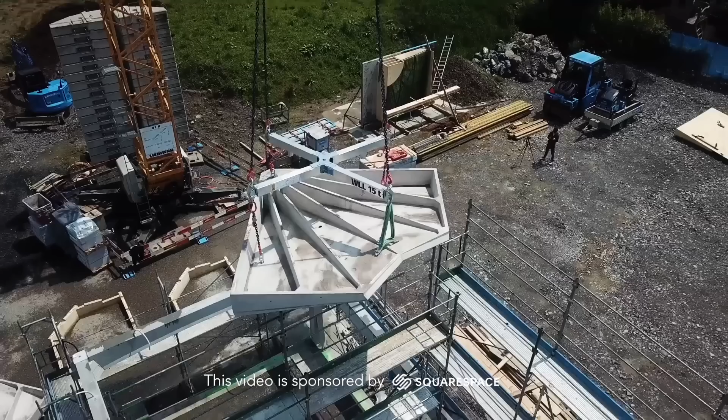Did you know that reinforced concrete has a hidden weakness, which turns buildings into a ticking time bomb? The buildings won't explode, but after 50 to 100 years, sometimes even earlier, many of those buildings will need to be renovated or even demolished. But there is more. The material is linked to the disappearance of entire beaches and responsible for insane amounts of emissions. But there might be solutions, which have been passed down to us through the ages.

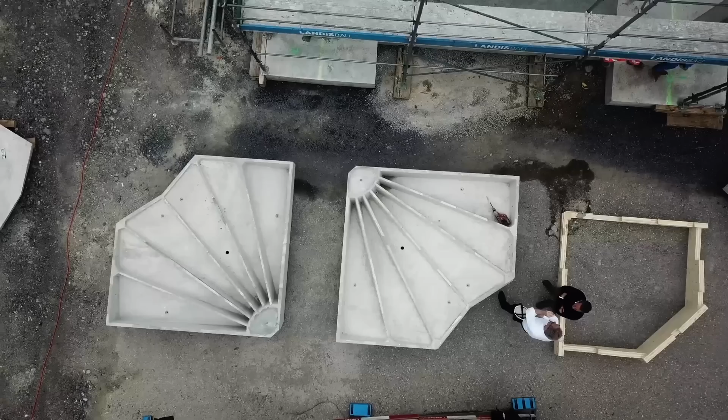In this video, we'll discover the dark secrets of concrete and reinforced concrete. We'll learn about some cool, little known solutions that might make the material more sustainable and far more durable. And why modernist architects fell in love with this material in the first place. And how this material's redemption could be found in techniques the ancient Romans and cathedral builders already used.

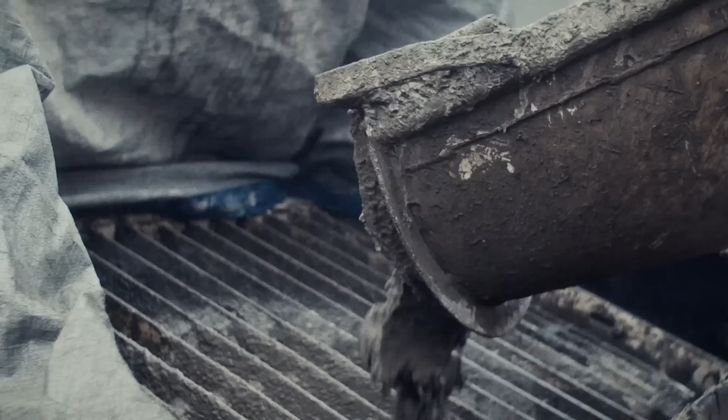In other words, I guarantee that by the end of this video, you'll be able to explain some of the biggest drawbacks of concrete and some of the solutions to get around these. So let's get started. Concrete. The construction industry loves it. The material is just so convenient and versatile, as it can be poured in all kinds of forms, giving designers a lot of freedom and enabling engineers to create ever more crazy buildings.

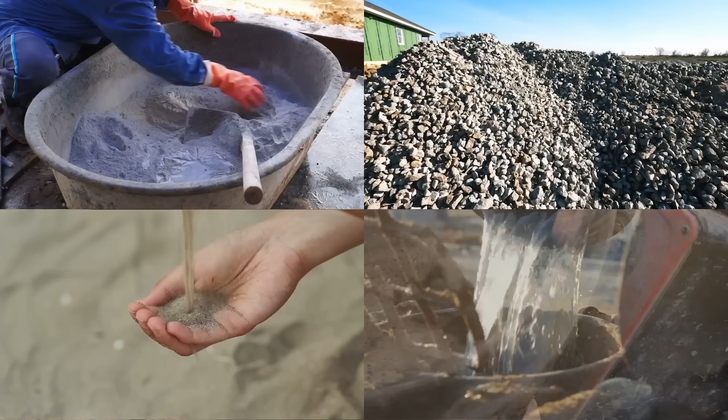Every second, all around Earth, 950 tons of concrete are poured. That's almost 48 fully loaded trucks. Modern concrete consists of 4 elements: Portland cement, aggregate or little rocks, sand and water. The cement is the most important part, as it is the glue that binds the aggregate and sand together. After the mixture is poured, a chemical process hardens it and it becomes a solid material.

Concrete, when it is used bare, is called béton brut by the French, which is what gave us the word brutalism, the name for a certain kind of architecture I'm sure you all enjoy seeing. The first forms of primitive mortar were already discovered in the oldest construction known to this day, Göbekli Tepe, which is 12,000 years old. But it was the Romans who started using proper concrete, or opus caementicium, a material they loved to use. In the Pantheon, for example, a building that stands to this day.

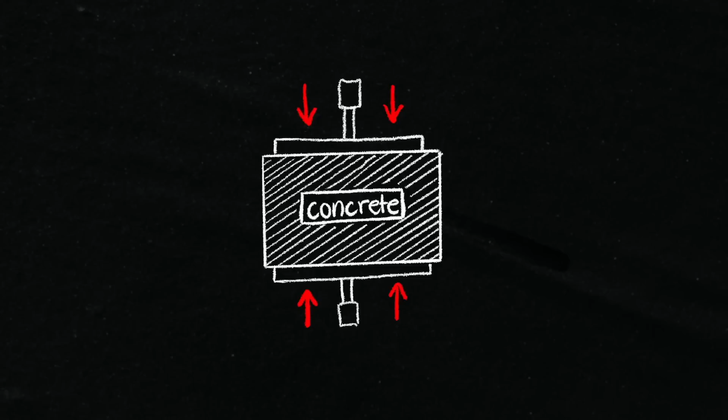But the Romans used this material in compression only. So why exactly is that important for concrete? You see, concrete is strong when it is compressed, when it is pushed together. But when you place concrete under tension, or when it is pulled apart or bent, it is weak. The Romans used concrete in such a way that its compressive strength was used, by using the geometry of the buildings to make them stable.

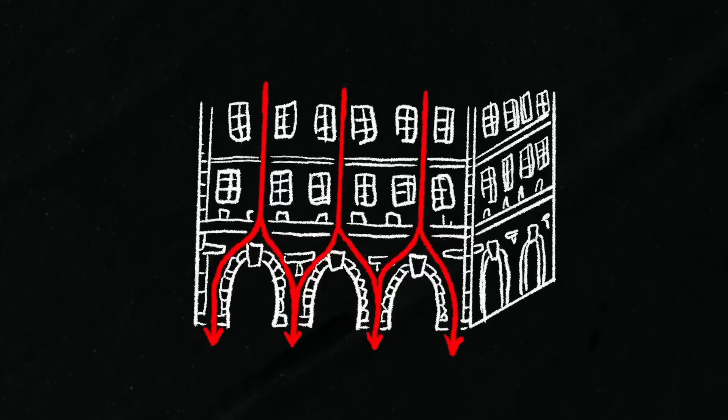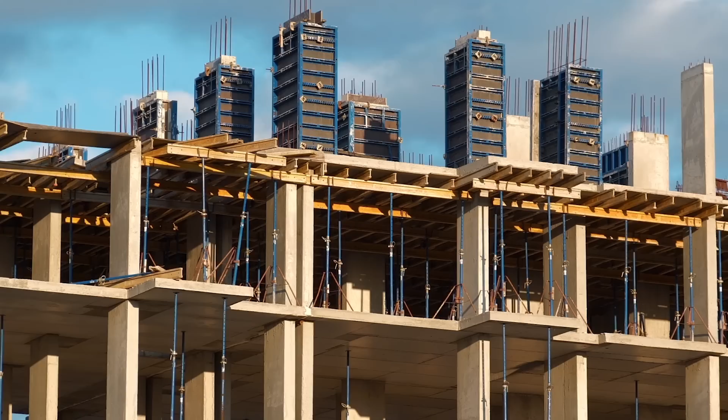For example, they would use arches and vaults to carry forces to the walls and pillars, which can take on big compressive loads. But nowadays, due to a revolutionary invention, we also use it in a very different way. I'll return to that in a minute. After Roman times, a long period followed in which concrete was barely used. It was almost forgotten. In the 1700s, innovation picked up again.

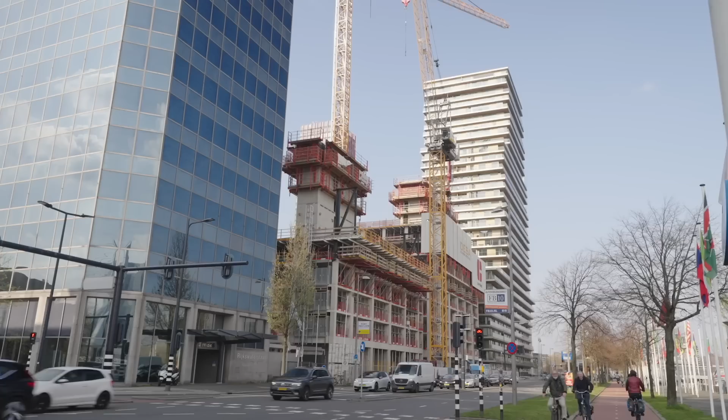And then, in 1824, a massive invention followed that would create a form of concrete we know to this day: Portland cement. This new, much harder type of cement was formed by combining limestone and clay that was burned to change its chemical properties. But this invention only brought us a little step beyond the ancient Romans. There was one more invention that would make concrete even more useful and versatile, thus completely reshaping the face of the earth. And that discovery was reinforced concrete, in 1849, by a Parisian gardener called Joseph Monier.

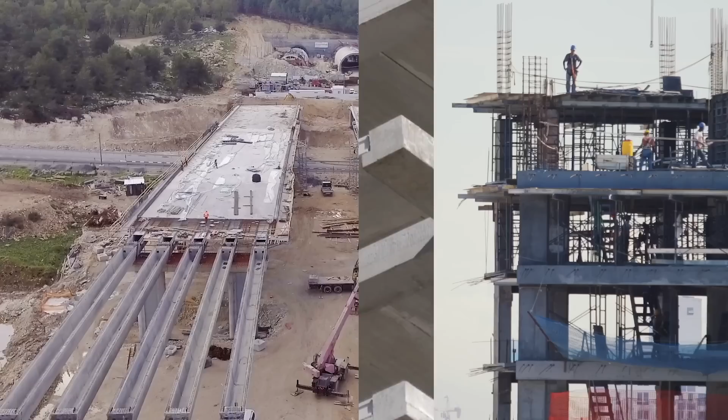Remember how I mentioned the Romans used concrete in compression? And that later we would start using it in a different way? Well, when you embed steel rods in concrete, which are able to stretch and bend much better, the resulting product is suddenly able to take on the tension forces too. In short, a new super material was born that could be used to create beams and plates that could hold weight under tension, like, let's say, for bridges or floor plates in buildings. This property was, until that time, reserved for other materials like wood and steel.

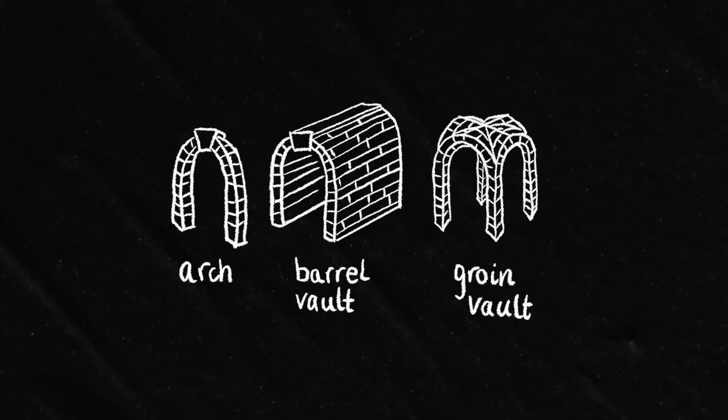Before, if one used rock-like materials like brick or stone, you would need to rely on either heavy stone lintels or arches and vaults to span distances. Those solutions worked perfectly well, and they still do. But with this new invention, it was suddenly far easier to just slam a reinforced concrete slab on top of some pillars and voila, you now had a cheap, rapid way to build with large floor spans.

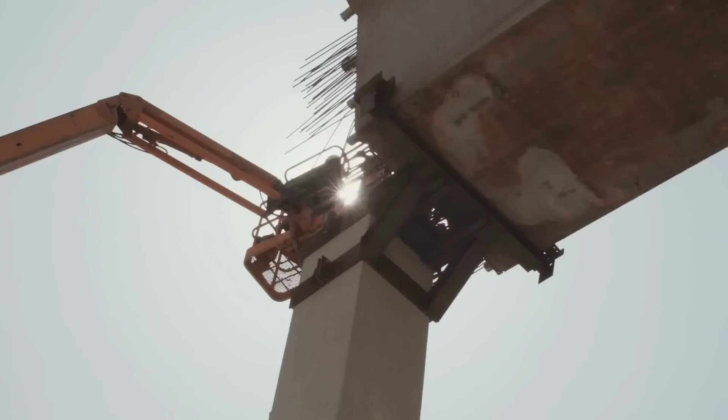Reinforced concrete took the world by storm. It really did change how the face of the earth looked, by changing the way we span distances and giving us a new way to build in general. But this new invention introduced a new hidden problem. A problem that not many people speak about. One that would prove to be the Achilles heel of reinforced concrete.

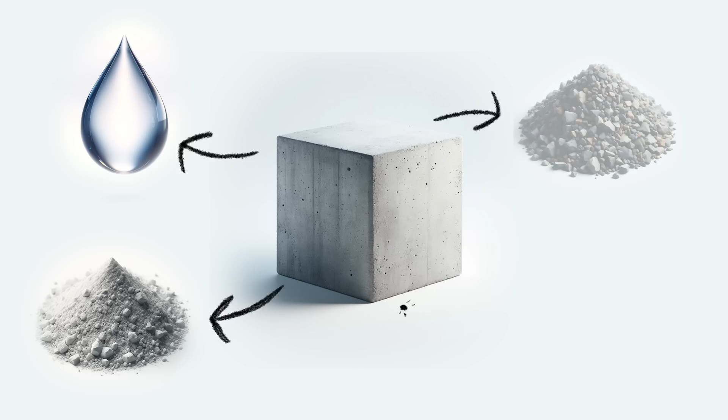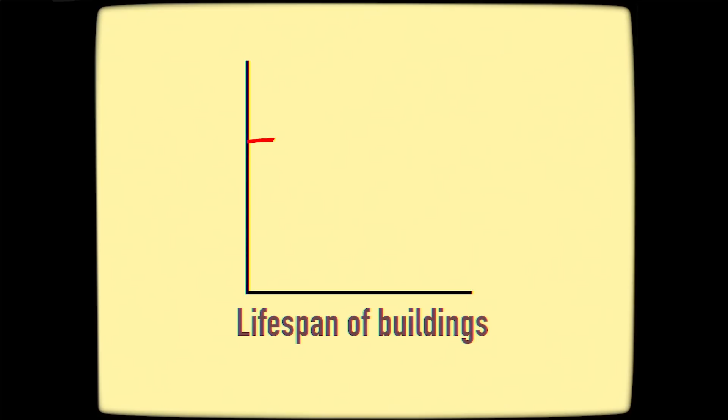Like I said, modern concrete consists of 4 elements: Portland cement, water, aggregate and sand. But in reinforced concrete, one extra element is added. Steel rods are placed in the concrete, called rebar, which gives reinforced concrete its tensile strength. This creates a first potential problem, greatly reducing the lifespan of reinforced concrete buildings. And that problem is oxidation, or rust.

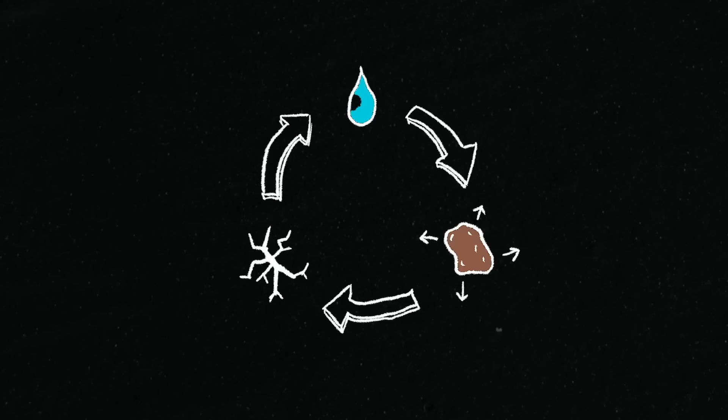As you might perhaps know, when steel comes in contact with water and oxygen, it starts to oxidize, or rust. And when steel rusts, it expands. The expansive force that presses against the concrete is so strong that it leads to little cracks. These cracks damage the structure, but also allow for extra water to enter. This in turn speeds up the rusting process, leading to bigger and bigger cracks until the structure can actually become unsafe. This vicious circle of concrete degradation is well known, and it leads to the limited lifetime of reinforced concrete, especially in areas near the sea, as the salt in the air makes steel rust even faster.

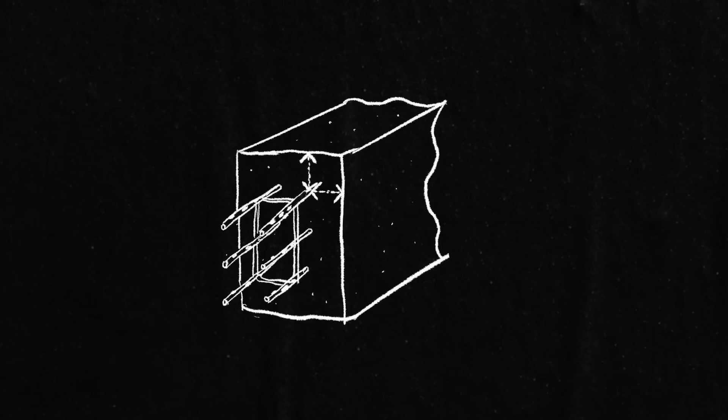But water can't always get to the rebar, right? What if there's cladding around the concrete building? Or if the rebar is very deep inside the concrete? Then water couldn't possibly get to it. Or can it? There are various ways in which oxidation can and will occur. Multiple chemicals and natural processes have the power to damage reinforced concrete. I won't go into too much detail, but I'll name them here.

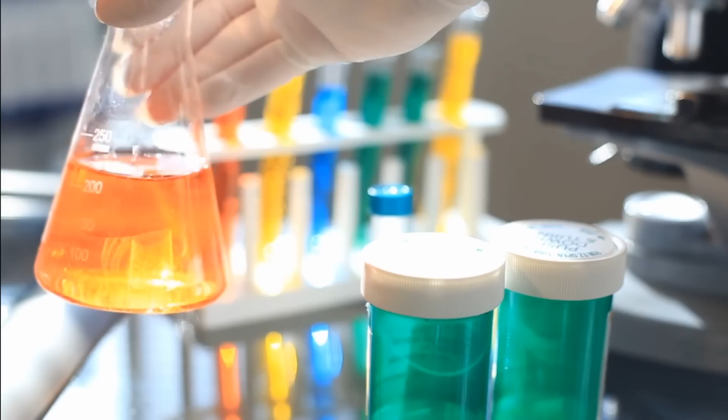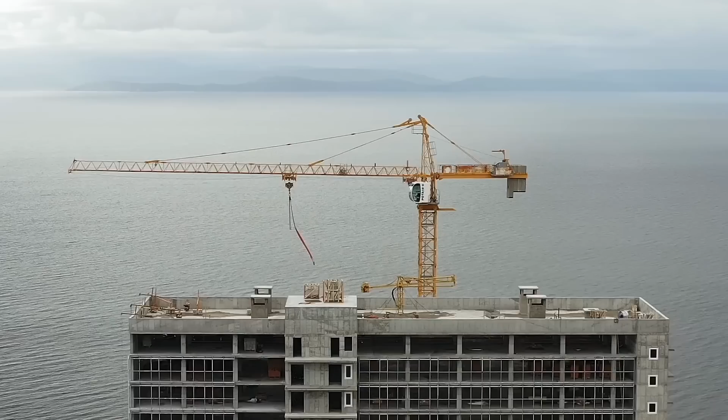We have carbonation, the feared chloride attack, the nightmarish sulfate attack, the formidable alkali aggregate reaction, and then there are freeze-thaw cycles, each leading to cracking and eventually to the feared effects of rust. The more bare the concrete and the closer to the sea, the bigger the risks are.

It is possible to slow down these processes, so the concrete lasts longer. One way is to increase the amount of cover. Cover is another word for the distance between the steel and the surface of the concrete. The further the chemical reaction or water have to travel, the longer it will take for the concrete to deteriorate. Problem solved, right? Well, not exactly.

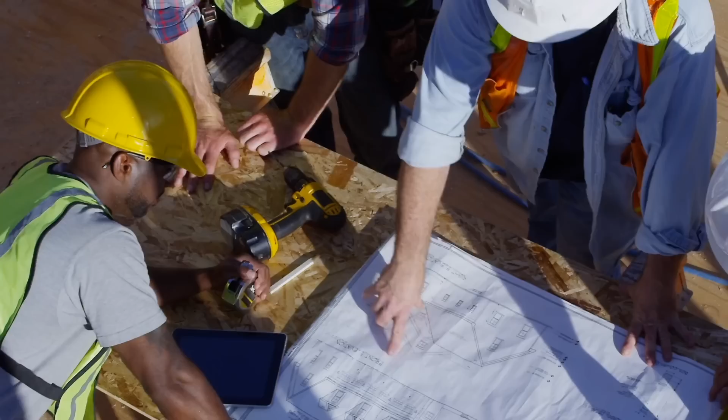To make sure this cover is always great enough, first one needs to know how much cover is needed. In the European Union there are norms for this, but not all countries have these norms. And contractors need to cautiously follow all these rules. And this sometimes fails. Even the best contractors deal with mistakes on the construction site. And some contractors don't take rules too seriously. Corruption, ruthless profit-seeking and plain old incompetence are widespread. So in many countries and in many buildings, weak spots in concrete buildings will be much more common. And then we're not even talking about the use of low-quality concrete or steel.

Even buildings constructed following the most generous norms and with capable contractors often aren't built to last for more than, let's say, 100 years, even though they could last longer. The economical lifespan of most buildings is only 50 years, just enough to repay the initial investment. And this is what many building norms are designed to provide for.

After the design lifespan of 50 years, it depends on the circumstances of the building to see what happens. Sometimes the rebar has already begun to degrade. In that case, a thorough renovation is needed, or the building is simply torn down. In the best case, the building can last another 50 years, or even longer with good maintenance.

But after the initial 50 years, due to the processes we described earlier, the rebar of many buildings will have begun their inevitable degradation process. Many of these buildings weren't built to be beautiful and long-lasting in the first place. They were built as an investment, and it shows. The will to save these buildings often isn't there, so they are often just demolished.

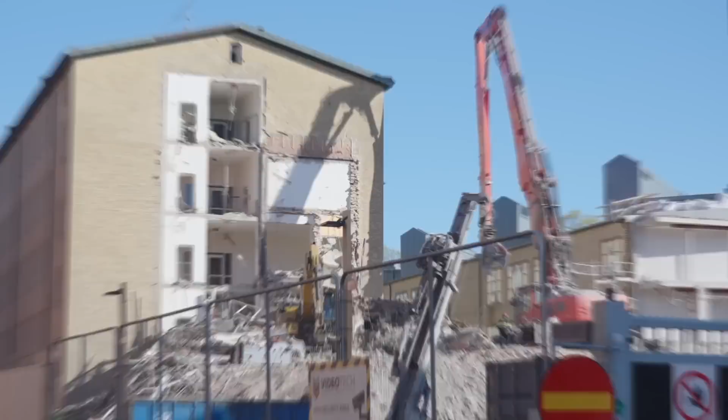Even if they are refurbished, what does it cost society if this has to happen to every building every 50 years or so? Personally, I believe we should think radically more long-term to be truly sustainable. Think lifespans of 1,000 years, not just 50. That sounds radical, I know, but if we start thinking like that, our building behavior will be radically different too.

Rebuilding buildings every 50 years or even 30 years leads to a mentality of, oh, we'll soon tear it down anyways, so we don't have any responsibility to make it really good. We start ignoring factors like reusability, adaptability and beauty. It's our short-term mentality that plagues our society as a whole as well. But there are more problems, which we'll dive into now.

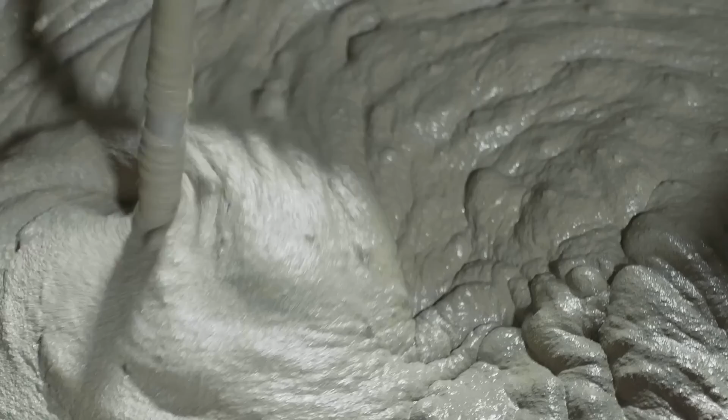Anyone who wants to reduce greenhouse emissions should be aware that the key ingredient of concrete, Portland cement, is one of the greatest causes of CO2 emissions. Up to 8% of total worldwide CO2 emissions are caused by the production of Portland cement. And that is just mind-bogglingly much. Much more than aviation, for example.

This emission is caused by the calcination process, where limestone is heated to high temperatures in a kiln, decomposing it into lime and CO2 gas. So if you want to reduce emissions, how would you do it? I won't go into too much detail here, but one could use other types of raw materials, alternative fuels for the kiln, improve manufacturing efficiency, and capture the carbon.

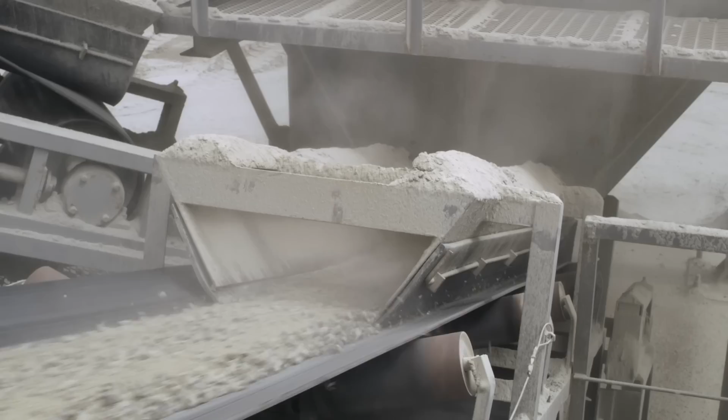For some purposes, we could even move back to hydraulic lime that was used before the advent of Portland cement, which was created in a slower but less energy-intensive process. However, the easiest and perhaps the best way forward is probably to use less concrete.

Problem 3. Impact on the planet. Carbon emissions aren't the only impact concrete has on the planet. One thing many people overlook is the many ingredients of concrete that each need their own hole in the ground, so to speak. All the ingredients of concrete, like sand, gravel and limestone, need to be extracted somewhere. And sand, for example, is already getting scarce.

Desert sand, which is plentiful, can't be used for concrete because it is too rounded and polished by the winds blowing it around. This rounded sand makes concrete weak and extremely dangerous to use. No, sand is needed from riverbeds, as this river sand has the rough edges that help it to bind the mortar. The scarcity of sand leads to bizarre problems.

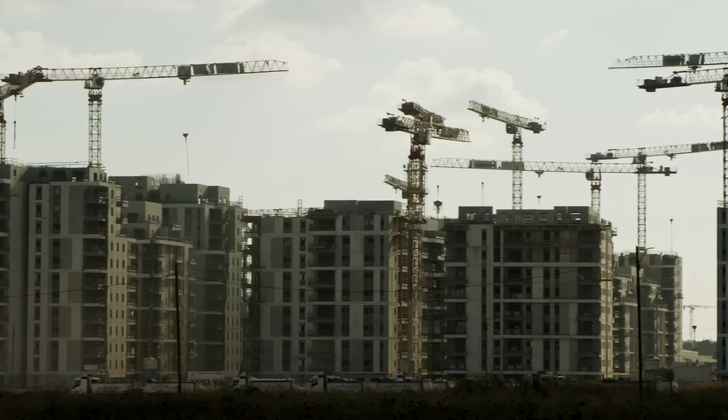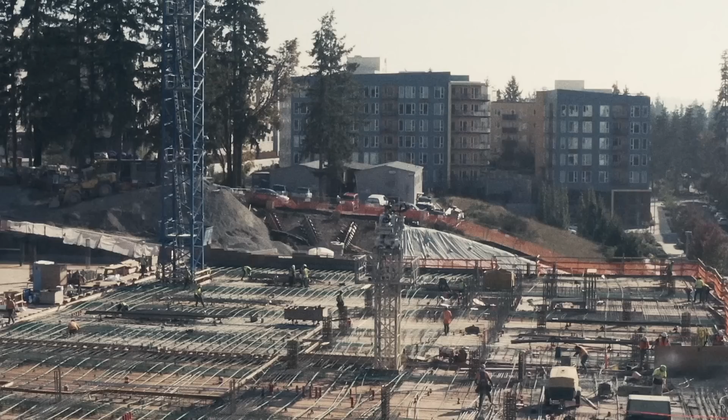The immense Chinese and Indian construction industries, for example, need so much sand that prices have skyrocketed, and a black market for sand now exists. Sand mafias use unethical practices to win this material, from the Caribbean to Africa to Asia. Riverbeds in sensitive ecosystems are sucked up, and even beaches are being stolen, often in the most vulnerable places. Our modern lives are literally built on sand, and the use of concrete is making this worse.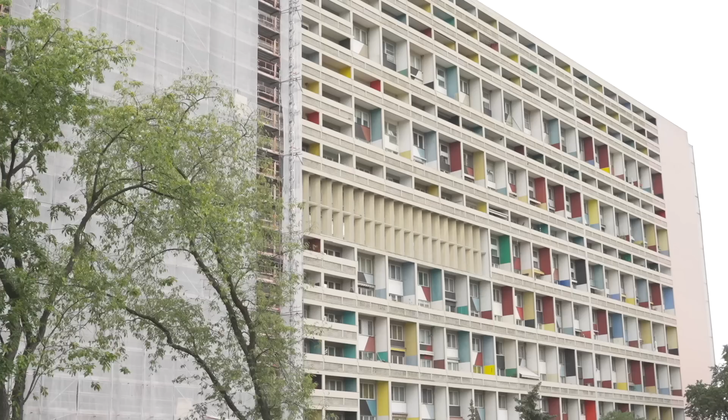Why are we so in love with reinforced concrete? For that, we need to travel back to the beginning of the 20th century, when industry continued to reform society, and a new architectural ideology was formed that fully embraced new industrial construction materials and methods. Modernism. The modernists embraced reinforced concrete like no others, because of its ability to achieve daring new forms with it. Forms that broke with the traditional. Forms for a brave new world.

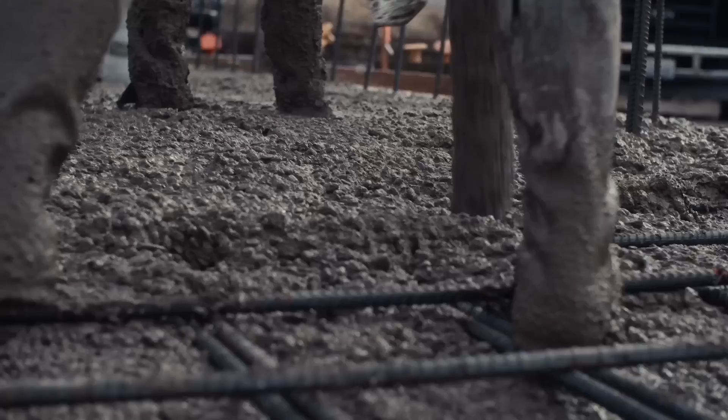Because that's what concrete allows builders to do. With reinforced concrete, architects could now make shapes that seem to defy the laws of physics, or create massive buildings with huge floor plates cheaply and efficiently. Buildings now turned into reinforced concrete frames with curtain walls as cladding, as these were the perfect match for open floor plans, which modernists loved so much.

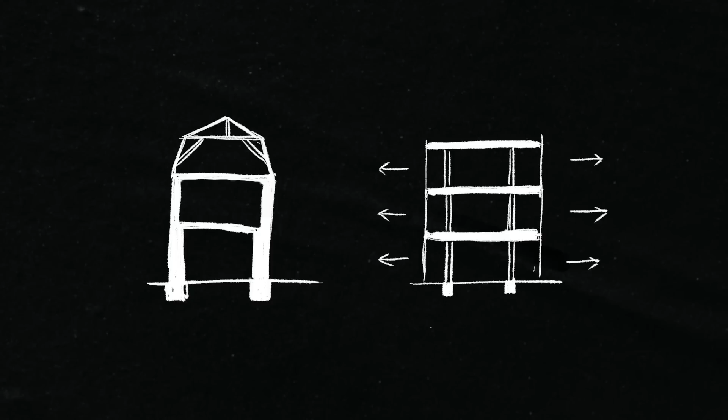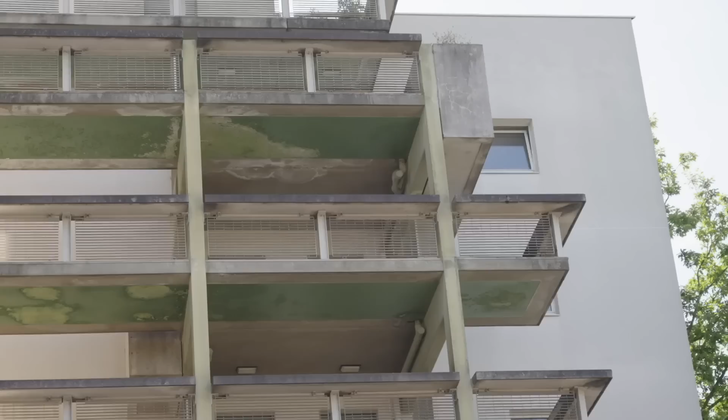Instead of heavy but durable load-bearing walls, a reinforced concrete skeleton now supported everything. This reduced the lifespan of buildings, because the strength of these modern buildings was now tied to how long the material could hold under stress. While before, as we already saw, buildings relied on the stability of their form, which led to buildings that could last much longer. Apart from that, modernist architects also loved to use bare, exposed concrete in their designs.

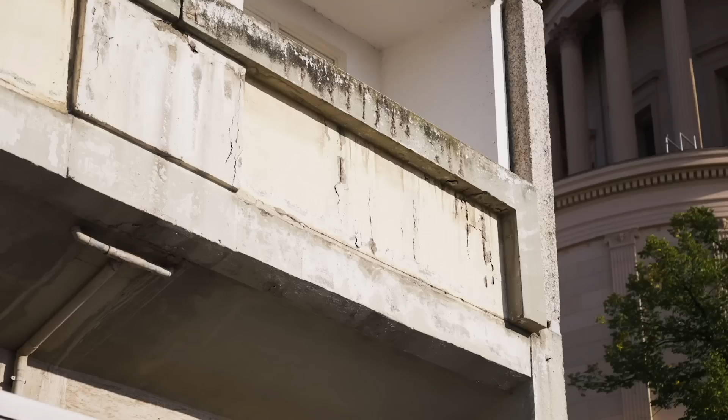Just take a walk outside, go to any place with modernist buildings and you will see it everywhere. When concrete is exposed to the elements, it's more vulnerable, and its degradation can happen much faster. Aesthetically, the stained, eroded concrete can make any place look miserable.

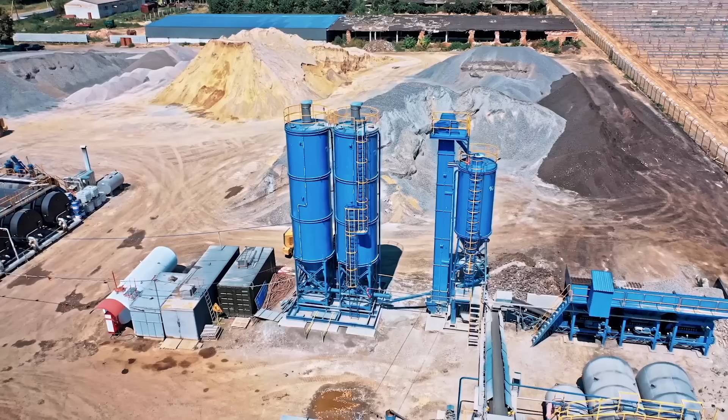A final effect of the embrace of reinforced concrete by the modernists was that it helped cement today's construction and concrete industry in place. Pun intended. And as a sad side effect, craftsmanship was basically exterminated, as well as the use of traditional construction materials. Today, we have to deal with the results.

Cities that look grey, with countless weathered, bleak concrete buildings, and a construction industry so dependent on concrete that they don't know how to change, even if they wanted to. Contractors have mostly lost the know-how to build with the longer-lasting, more sustainable methods and the time-tested materials we know from before. While these might be exactly the solutions we need to solve today's problems. So, isn't there any hope?

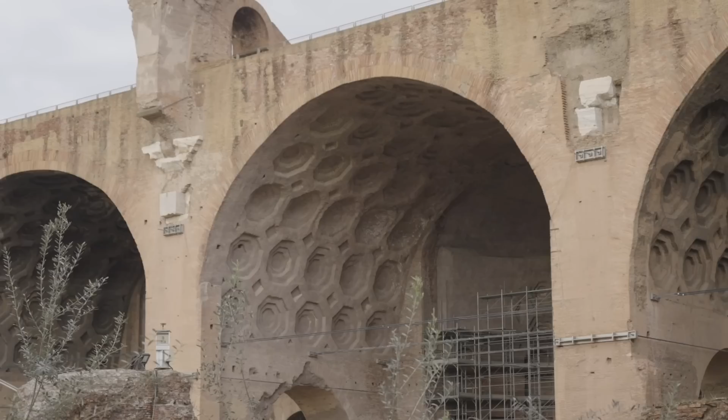Well, happily there is. Because the laws of physics don't really change over time, we can still use concrete in another way, making use of its compressive strength. We can do this in two ways. One is to build like we did before, using geometrically stable forms like arches and domes. The advantage is that it's very beautiful, but the disadvantage is that it's not always cheap or practical to create giant barrel vaults for every project.

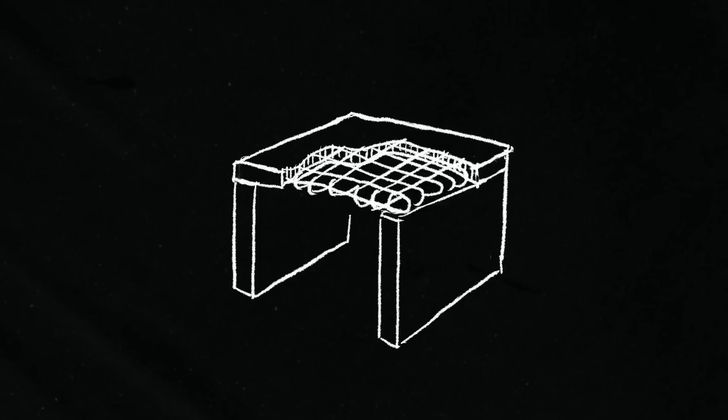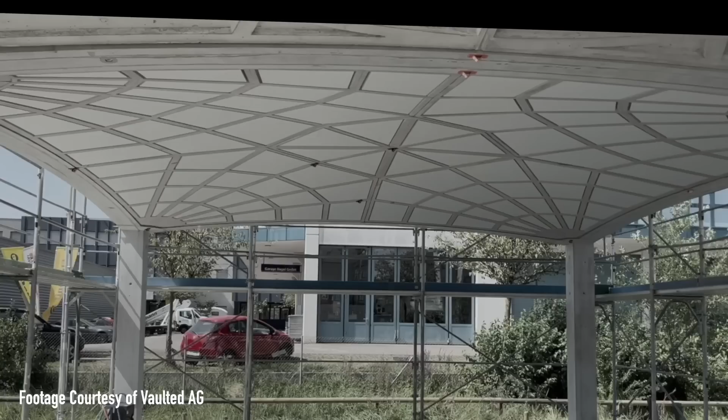Sometimes it's very handy to have a concrete floor plate that spans larger distances, but even then one can use compressive strength to their advantage. That's where a Swiss company comes in, called Vaulted, who learned from the cathedral builders by using ribbed vaulting to create a floor plate that doesn't need any steel reinforcement and far less concrete.

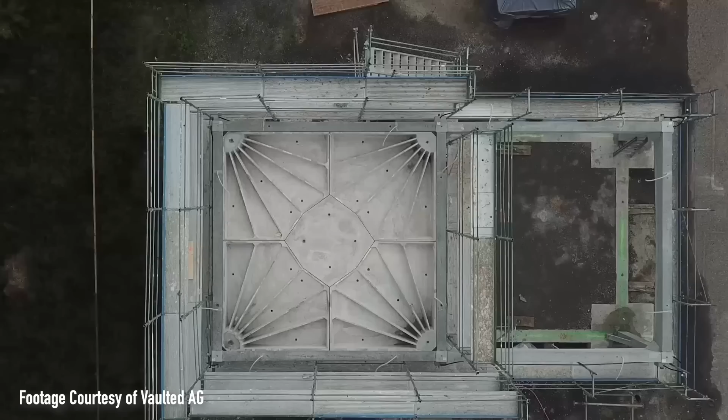The floor plate is basically a very flat dome, which transfers the forces through ribs down to the corners, making smart use of the compressive strength of concrete. The floor plates still need to be inserted in some form of frame, but it is an elegant solution. I'm very curious to see if their floor plate product will take off.

Instead of concrete, we could always use other materials. One modern material that has become very trendy is cross-laminated timber, which is now being used even for high-rise buildings. Although it is supposedly sustainable, it is not known yet how long CLT can last. Then there is natural stone.

So what should we do? If we want to build sustainably, it is essential that we respect the forces of nature and that we build with long-lasting materials instead of using materials with hidden problems like reinforced concrete. We can still work with the forces of nature to create buildings that sustain through their geometry. In that case, we can even continue to use concrete.